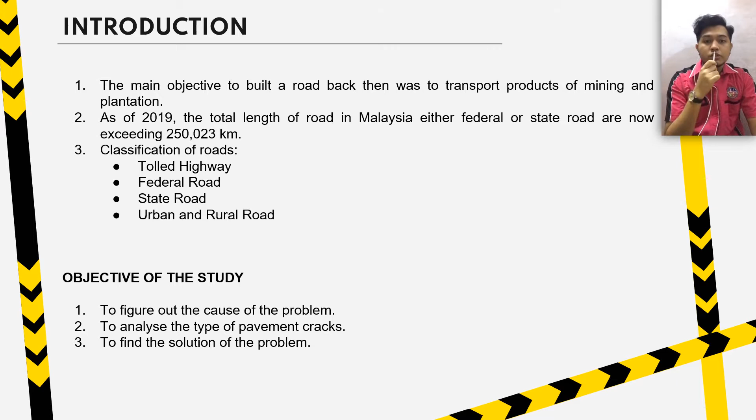For the background of the study area, Kampung Parit Tengah is located in the middle of the border between Muar district and Batu Pahat. This village was founded in 1942 with the original name of Kampung Sarang Buaya in Mukim Sungai Balang. In this case study, the road is Jalan Parit Yusuf, located in Kampung Parit Tengah, Muar, Johor, and it links Jalan Muar Parit Sulong to Jalan Muar Batu Pahat. This route is the only way for the villagers of Kampung Parit Tengah to go to the nearest wet market.

The road is an estimated 3 kilometers long with a width of 3 meters. Along Jalan Parit Yusuf, the road is paired with a small ditch or channel, which we call a parit, with a width of 3 meters and a depth of 2 meters. The gap between the road and the channel is about 2 meters. In early 2019, the road was resurfaced from the old surface by the local authorities. Unfortunately, the road surface is becoming damaged day by day.

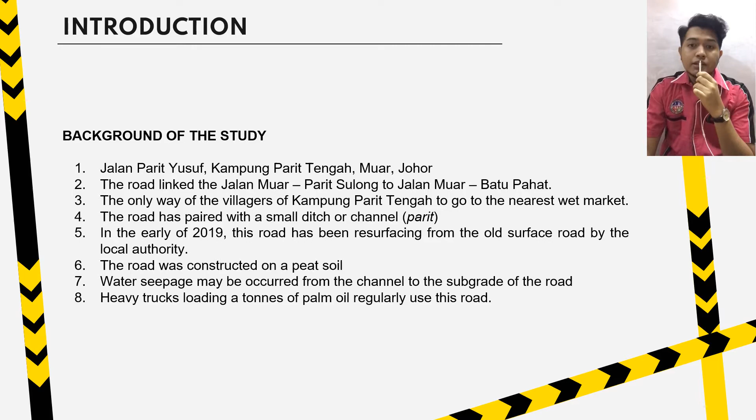For the problem statement, the first problem in Jalan Parit Yusuf, Kampung Parit Tengah, is that the soil foundation under the road is peat soil. Peat soil is renowned for having a lower shear strength, higher compressibility, and a higher water content, and is especially vulnerable to deformation and failure at light surcharge load. Assessing peat soil is typically difficult because the water table is typically close to, on, or above the ground surface.

Okay, the next problem statement is that there was water seepage from the ditch into the pavement. Wet ground around the ditch is unstable and can rise to the bottom of the ditch. The groundwater table will rise and the moisture content in the road structure will increase.

The third one is that the road often gets stressed from heavy vehicles. Heavy vehicles entering the village road to transport oil palm cause the road to be damaged from time to time. The road is the main road for residents to commute to work every day, in addition to transporting agricultural products such as palm oil.

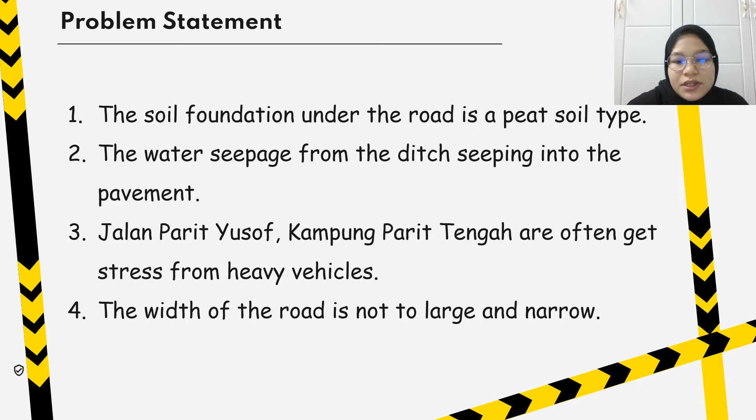Next slide, I will explain the PCI index that we obtained from our study, conducted in Jalan Parit Yusuf, Kampung Parit Tengah. As you can see from the table, there are several types of cracking we identified on the pavement, such as alligator cracking, edge cracking, potholes, longitudinal and transverse cracking, and also weathering or raveling.

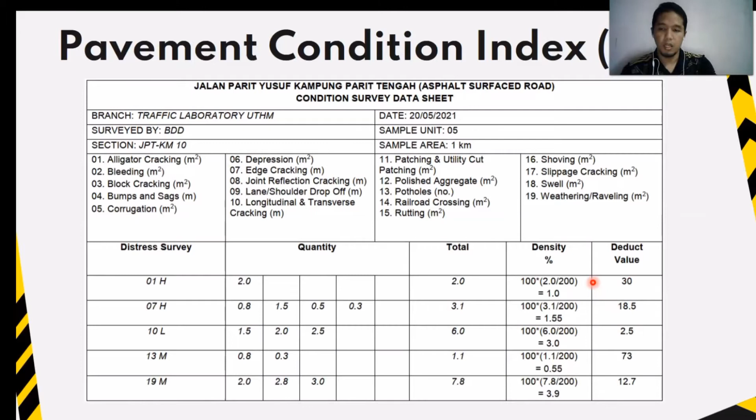After identifying the types of cracking, we calculate the density and get the deduct values. Next, we calculate the maximum allowable number of deduct values, m. The highest deduct value from the table is 73, and we got m as 3.5. Then we arrange the deduct values in descending order; the number of deduct values is 5. Since the maximum allowable number of deducts is 3.5, only the first 3 and 0.5 of the fourth deduct value are selected.

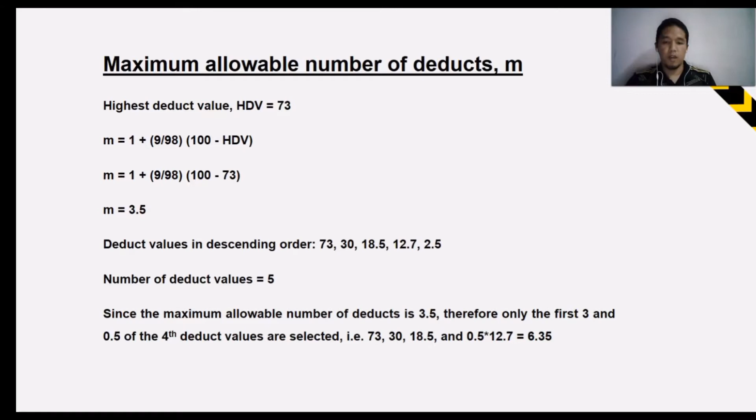Next slide, we calculate the maximum corrected deduct value, CDV. The total deduct value we got is 127.85, and then we find the CDV value from the chart curve, which gives 73. After calculating the total deduct values, the highest maximum CDV is 79.

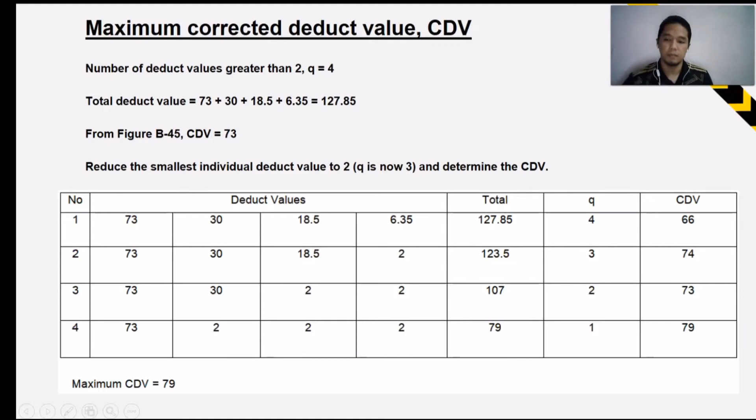Next, to determine the pavement condition index, PCI, the calculation is 100 minus CDV maximum. The CDV maximum is 79 from the table above, so 100 minus 79 gives 21.

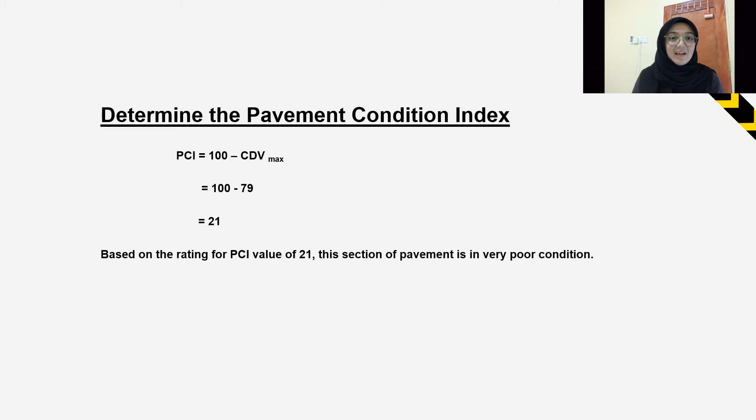Based on the rating for a PCI value of 21, this section of pavement is in very poor condition, as we can see from the standard pavement rating table based on PCI. It is between 10 and 25, and we get 21, so the rating is very poor. Based on the result, the maintenance activity should be reconstruction and deferred action.

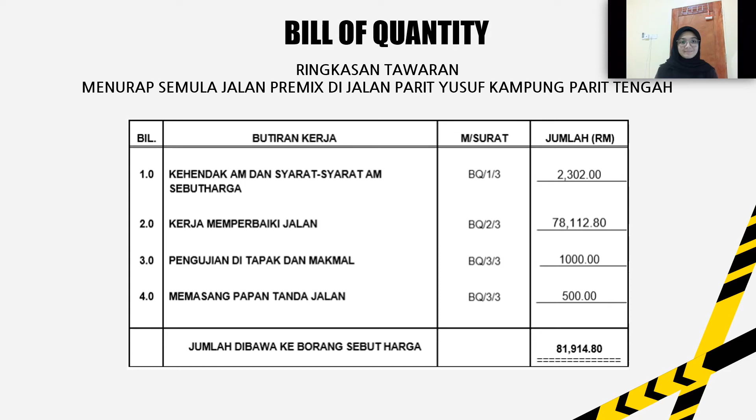For the recommendation, the first recommendation is to install geotextile and geogrids. Since the roads are being constructed above the peat soils, the pavement structures need to be strengthened enough to retain the weak soil beneath the structures. Hence, to strengthen the pavement structure, geotextile and geogrid need to be added at the pavement structure. As for this study, the geotextile will be placed at the bottom of the pavement structure between subgrade and subbase to separate the material used in the structure itself.

And at the upper part, geotextile will be placed before the surface layer, which is wearing course and binder course, to avoid vertical water seepage from entering the pavement structure. Geotextile will also act as the reinforcement to the pavement structure. With the usage of geotextile in soil, it will increase the tensile strength of the soil, and it is the same theory as steel does in concrete.

Geogrid is a type of geosynthetic material. It is a polymeric structure that is produced in the form of manufactured sheets containing a large network of connected elements through different types of bondings. Commonly, the usage of geogrid is needed at areas of heavy traffic. Since these roads are connecting two main roads, heavy traffic will occur at several times. The application of geogrids will help to improve the strength and the stability of the pavement structures.

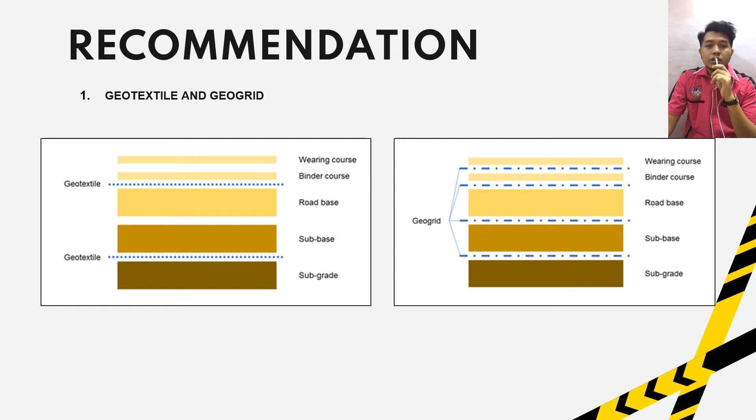For this study, the application of geogrid will be located between the subgrade, subbase, and surface layer. At the surface layer, geogrid can be placed at the middle of the layer to act as reinforcement to give more strength to that layer.

The second recommendation is culvert. To avoid the water seepage, the natural ditch should be replaced with proper channeling, which is a culvert. Generally, culverts are used to flow water under roads and railways, but in this case, the culvert will be installed beside the roads. The most suitable type to install in this area is open-top box culverts. Box culverts are made of reinforced concrete. The box culvert is a rigid frame structure and very simple in construction. Hence, it will shorten the time taken to install, and it can avoid traffic congestion during construction.

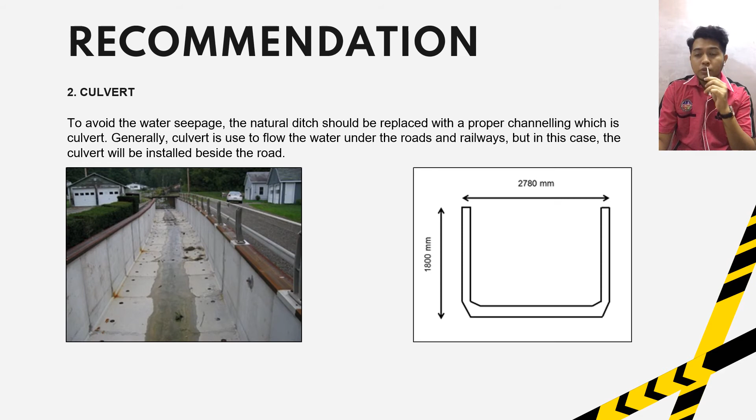Thus, from the observations that have been made and following the standard size by the manufacturers, the suitable dimension of culvert in this case is about 2,780 mm width and 1,800 mm depth. For the third recommendation, maximum loading signage.

In 2019, the Department of Public Works (JKR) stated that Jalan Parit Yusuf is classified as list number 1 in the Book of Road Statistics 2019 edition. List number 1 means vehicles with a maximum weight not exceeding 5,000 kg or 5 tons can be used on the roads. Hence, to avoid vehicles with a loading more than the maximum value, proper signage needs to be placed at the entry of the roads.

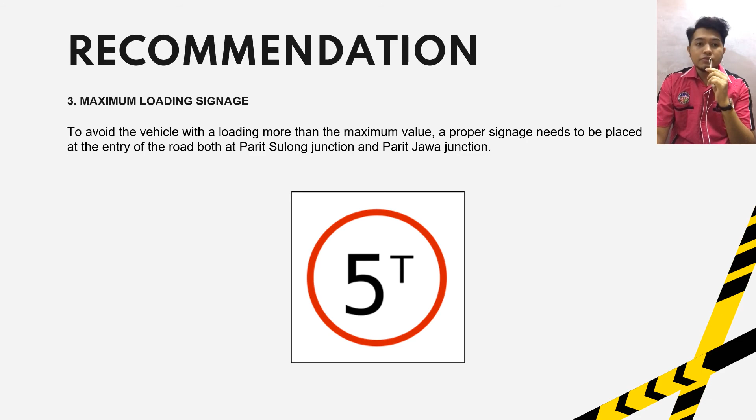And lastly, the expectation of the recommendation. At the end of the study, Jalan Parit Yusuf will have a very smooth pavement surface. This is because the pavement structure has been stabilized and strengthened by applying geotextile between the subgrade and subbase and between road base and road surface. In addition, geogrid gives reinforcement to the structure where it has been placed in the layers. Hence, heavy traffic will no longer affect the pavement.

With these kinds of road reinforcements, the road lifespan will increase and automatically reduce the cost of maintenance. Next, the traditional natural ditch will no longer be in use. The installation of open-top box culverts will totally avoid water seepage from the ditch into the pavement structure. At the same time, the box culvert will provide a better flow of water and easy maintenance in the future. Lastly, the loading limit signage. Installing the sign at every road entry can give awareness to drivers before they use the roads.

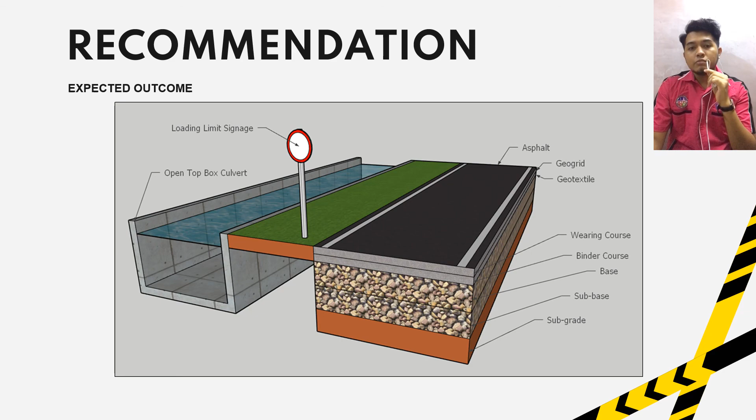The last one, the conclusion. Jalan Parit Yusuf, Kampung Parit Tengah Road is often used by heavy vehicles loading tons of palm oil. Jalan Kampung Parit Tengah also rarely has accidents involving lives except minor accidents. Based on our findings and analysis, geotextile is the appropriate material for numerous infrastructure projects like highways, drainage systems, landfills, harbours and more. It prevents two neighboring soils from combining by separating subgrade soil from the base course aggregates. The natural ditch should be replaced with proper channeling, which is a culvert.

We can conclude that the total value for the bill of quantity of general requirements and general conditions, road improvement work, site and laboratory testing, and installing road signs is RM81,914.80. Thank you.